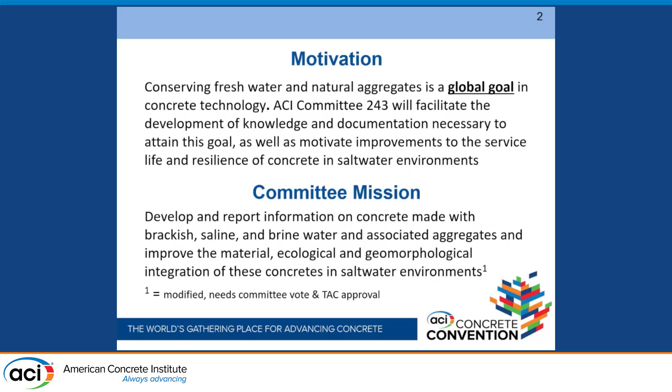So the membership of the committee a month ago was as follows: 27 voting members, 13 associate members for a total of 40. In the last 2 days we added 2 new members in terms of voting, so we are at 29. So for a new committee, this is kind of impressive, I believe.

As I mentioned before, this is a global issue, and as a global issue, it requires a global perspective, and collaboration with others is of fundamental importance. So we have a liaison with the Asian Concrete Federation. Why ACF? An incredible amount of work is being carried out by colleagues in that region of the world, and in particular in China. The motivation is very interesting: construction at sea, but not only construction at sea where there is no availability of fresh water, but also in places like Hong Kong for the conservation of fresh water.

The other level of collaboration that we have is with an activity that started in the Kingdom of Saudi Arabia, the NovusCrete Consortium. The presentation will happen after mine; we switched the order to give time to colleagues to upload it. So the presentation on NovusCrete will be following mine, and it will give you an opportunity to understand how important this activity is, particularly with the clear objective to come to the deployment of the technology and the development of the tools, specifications, standards that allow the use of this material.

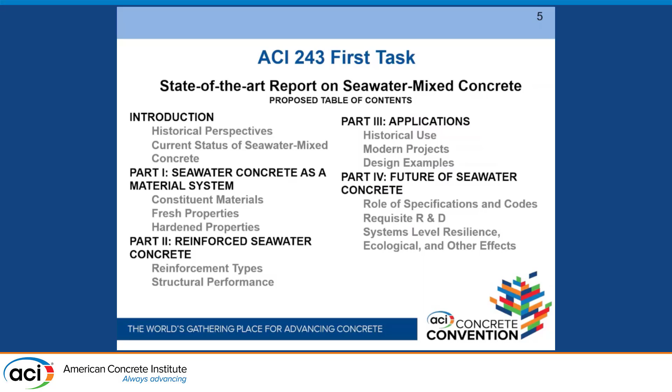The first objective of the committee is to develop a state-of-the-art report. This is a snapshot of what the situation currently is in this space of seawater concrete. What you can see here are proposed titles for the sections, the parts or chapters of the document. The committee met today and had a discussion, more than a discussion. I made a presentation on what the vision for the state of the art is, and shortly we will get to work on it.

Okay, so what I showed you in the previous slide, I'm going to try to speed up. Thanks, John, for also staying up front, just in case we panic one more time.

And so this is really, I want to give you a quick look at where we are today. And this, again, speaks to that issue. I also want to make sure that you recognize the names of the individuals who have helped me in developing this very short presentation. Their names are listed there.

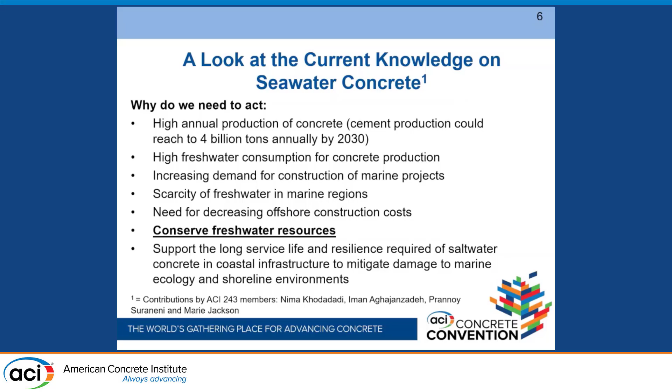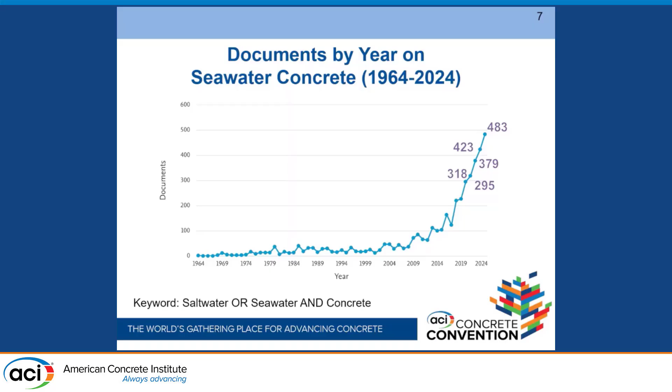Very interesting, some slides that give you an idea of the excitement with numbers. Data, we are data-driven, right? So Dr. Khodadadi just came up with this idea of looking at artificial intelligence and have a look at what are the documents available now in the free literature around the world. And as you can see, really, after, let's say, the year 2000, there has been an explosion of research and development in this area. And so this year alone, we are close to 500 documents.

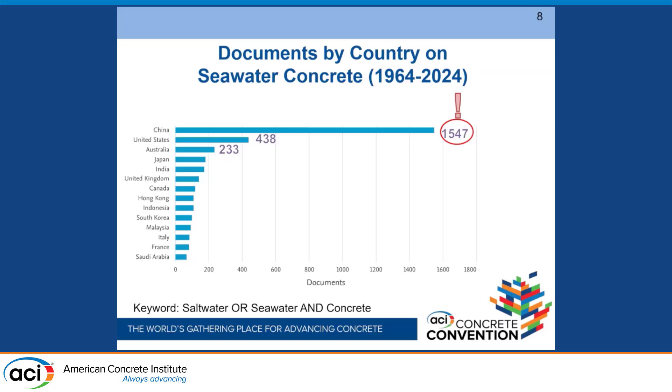If you want to see where are the places where this research in particular is taking place, obviously you look at China. And the US is a distant second. So this is not an issue who is doing more and why. The issue is that there is a dramatic interest in a country, and that country is kind of leading the research, and that's why we also have a need for collaborating with them.

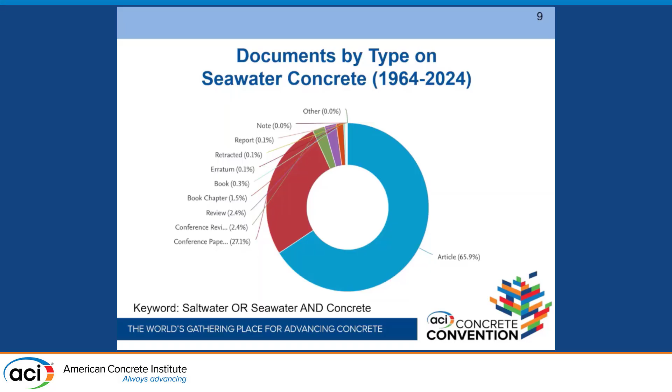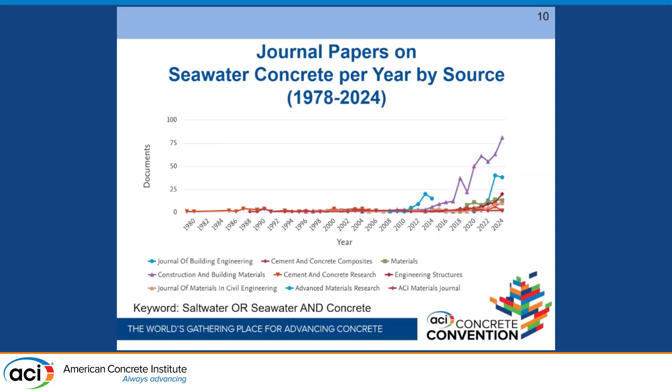In the next few slides, and also in the interest of time, I'm just going to cut them short, but if you think in terms of what do we know now, and what are the issues that are relevant to this system that we now call concrete with seawater, these are some of the, let's say, issues that are of relevance to us.

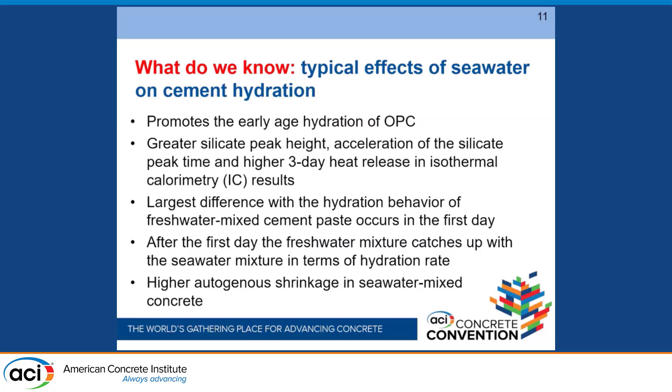The first thing, if we look at the effects of seawater on cement hydration, I would simply summarize it the following way. It will expedite the setting of the concrete, so there is an impact on workability as well as setting time. So there is no doubt that the current literature has identified that.

In the microstructure, there is certainly an effect on the microstructure of the concrete, and this is due to the presence of the chloride ions. And the formation of the salts is interesting because it changes the microstructure and has implications on the way that the concrete behaves, especially in terms of the density and the porosity of the paste.

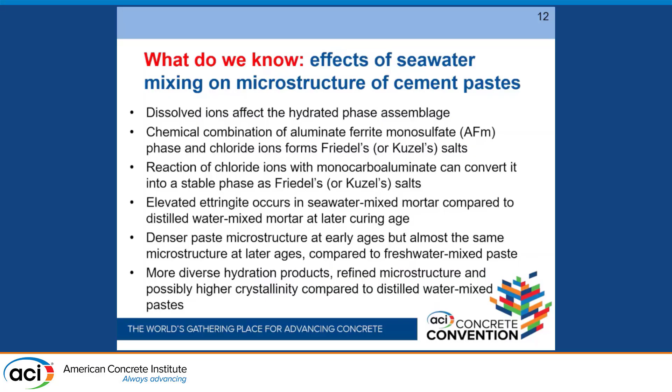Some of these statements could be viewed as, I would say, not controversial, but not definitely accepted by all the researchers. So one of the topics of interest to us is to develop a mechanism to avoid controversial opinions, if possible, or whenever possible.

The mechanical properties: what is the effect of seawater on concrete in terms of mechanical properties? Again, to summarize briefly, the early strength, because of that rapid setting, tends to be higher at 3 and 7 days, perhaps identical at 28. And then after that, it depends on the researcher. In some cases, we've seen increases, some cases the same, in some cases slightly less.

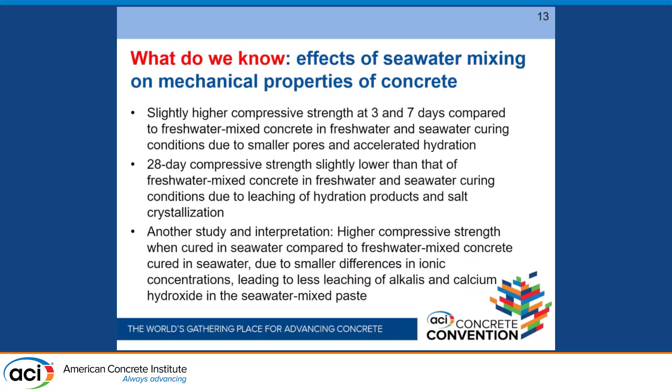Very interesting, the issue of the chloride binding. So we now inject chloride intentionally in the concrete because we're using seawater. What happens to them? And so this very interesting phenomenon, the formation of salts, as you see indicated in the slide, the effect on porosity is obviously significant, but this doesn't mean that we can still use black steel.

Okay, black steel meaning steel that is not protected, because obviously corrosion will be the outcome of the use of seawater. The chloride ions remove the passivation of the steel even in an environment that is high pH, and obviously the result would be exactly that.

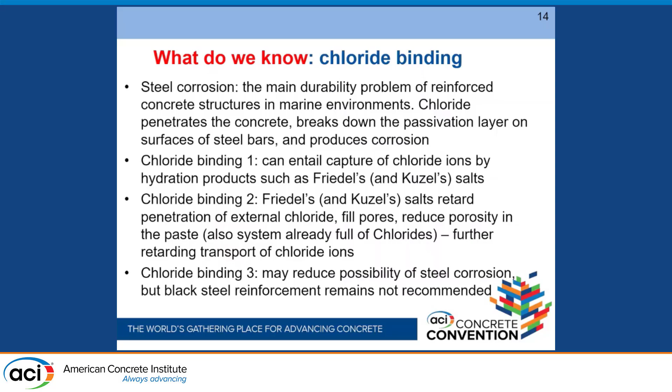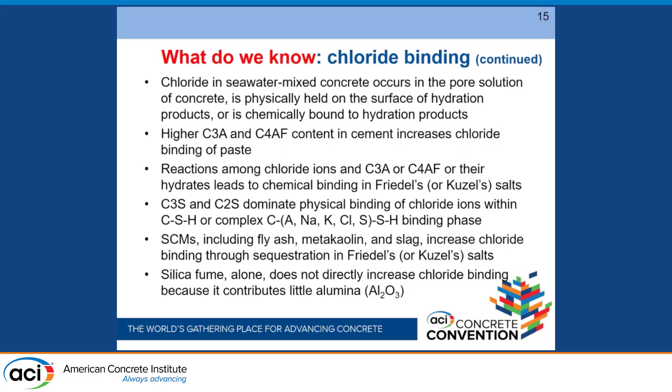More on chloride binding, the role, for example, of supplementary cementitious materials appears to be one of the interesting additions to the mixture in order to make it sustainable. One of the things that is rather difficult to identify in the state of the art today is the durability of this mixture. Okay, the durability, Dr. Jackson reminds me that sustainability and resilience may be more important than durability, or they include durability. But the entire point that we're trying to make is, if you are using materials that are non-conventional, you have an additional obligation to look at the durability aspects.

One of the perhaps most interesting aspects from a research standpoint is sulfate attack in the presence of seawater. Because seawater, fortunately or unfortunately, contains some of these sodium sulfate or magnesium sulfate, and they have obviously an effect in terms of, let's say, reaction with the gypsum. And this leads us to the understanding that when we say seawater, we also need to be cognizant of what are the chemical compositions of the seawater.

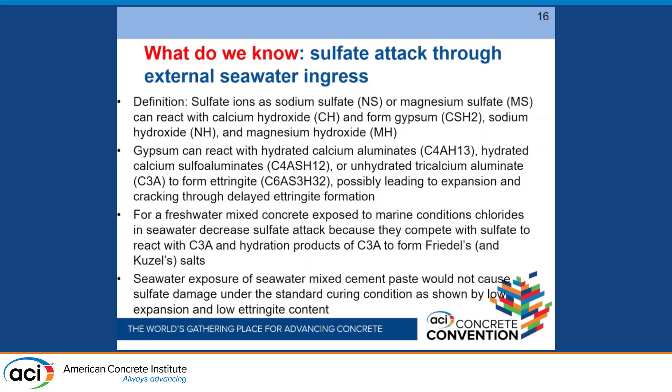So seawater is a generic term. It's like saying concrete, but there is concrete and concrete. So there is seawater and seawater, and so we need to be, if not careful, cognizant that different oceans have different levels of constituents in terms of different ions.

So here more on sulfate attack, and very interesting, even though it's taken, let's say, a secondary role, at least in this presentation, is also the use of aggregates that are directly taken from the seabed and utilized as sea sand. And the use of sea sand is not original, right? Because if you wash it, it's as good as the sand that we mine. But here, again, the idea is to be able to use sea sand without washing it.

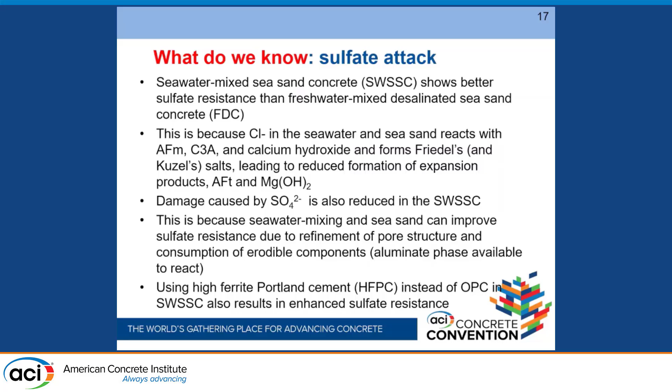And you will hear in the next presentation, there is not only an interest in sea sand, there is an interest in desert sand. In other words, it is all the materials that today we do not recognize as good constituents for concrete that we think have an opportunity to deliver something that is sustainable. Finally, some recommendations for future research. This is where the academic side of the world, but not only the academic side, but certainly also industry, and in particular some of the companies that focus on admixtures, should have some consideration of these items.

So expand data on durability. This is key, right? The trademark of sustainability is in the fact that we design for the future. If you were at the presentation just an hour ago at the international luncheon, the speaker was asked how long this tunnel is supposed to last according to European Union requirements: 120 years. So 120 years has become the standard for infrastructure in Europe, and I think this is the type of objective that we try to attain.

We have to resolve some of the contradictory results. Will we be able to do it for good and forever? Probably not, but certainly this is something on which the research community is asked to provide some light. Optimize concrete designs, and this is again key if you want to move from research to implementation and field deployment. This cannot be done without specifications. So the tools for the engineers and the specifiers have to be present, otherwise we will only work in demonstration projects.

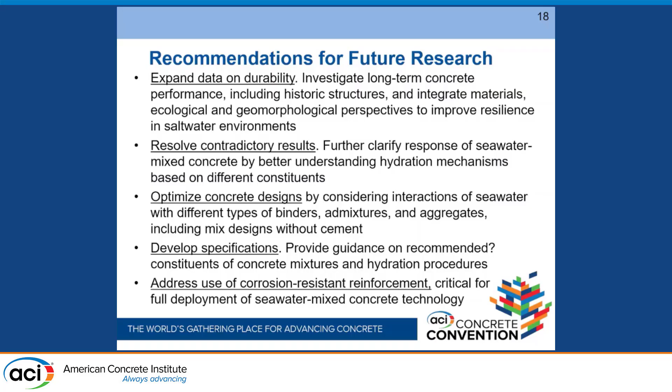And then the last item: concrete without reinforcement is like an orphan child, in my opinion, and obviously we need to look at reinforcement that is corrosion resistant. Would it be composite? Would it be steel with appropriate coatings? Or would it be stainless steel? So this is what we are indicating to the research community as the gaps that we still have in order to make this technology suitable.